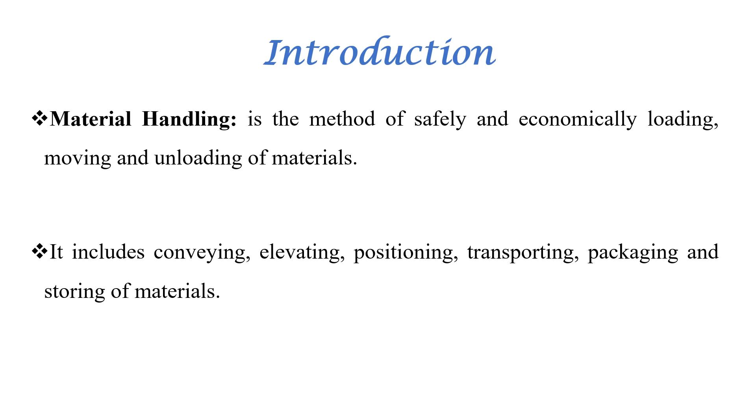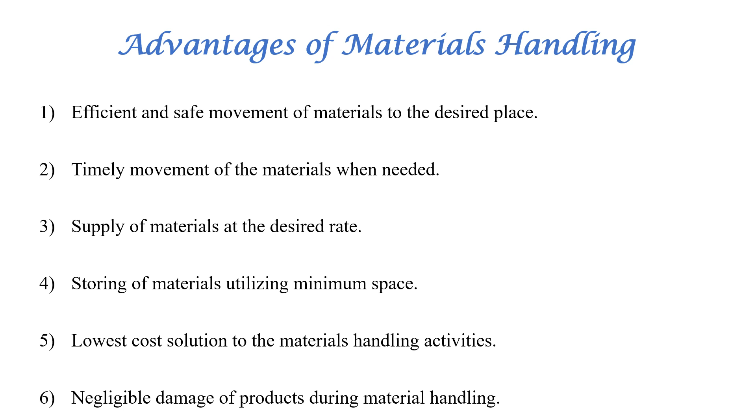Now, advantages of material handling. The essential requirements of a good materials handling system may be summarized as efficient and safe movement of materials to the desired place, timely movement of the materials when needed, supply of materials at the desired rate, storing of materials utilizing minimum space, lowest cost solution to the materials handling activities, and negligible damage of products during material handling.

Now, limitations of material handling. The previous slide clearly shows the importance of material handling in an industry or a material transportation system. However, the negative aspects of material handling should also not be overlooked. So, limitations of material handling are additional cost involved in any materials handling system.

Once a materials handling system is installed, flexibility for further changes gets greatly reduced. Failure or stoppage of the materials handling system at any level of operation may hamper the production system, and the material handling system needs regular maintenance.

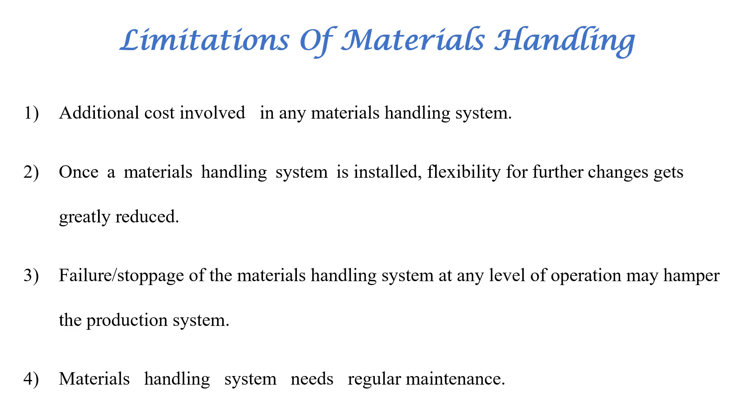Now, classification of materials. Material handling system depends on the type of materials to be handled. Materials may be categorized based on their state, size, weight, etc. For example, physical state deals with solid, liquid, and gases.

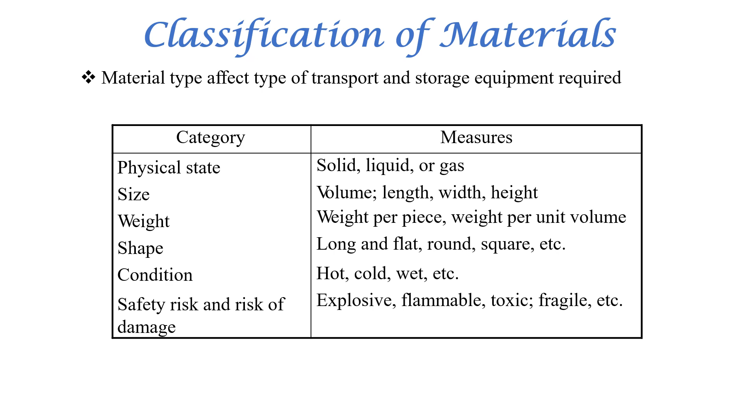Materials can also be classified into unit load and bulk load. Unit load: these are materials which can be handled, stored, and controlled as a single entity. It is counted by number of pieces. And bulk load: these are powdery, granular, or lumpy materials which can be stored in heaps. And unitization is a process of converting bulk load to unit load.

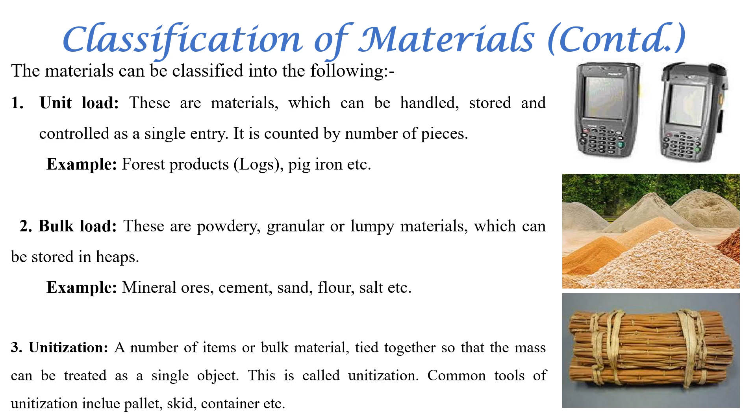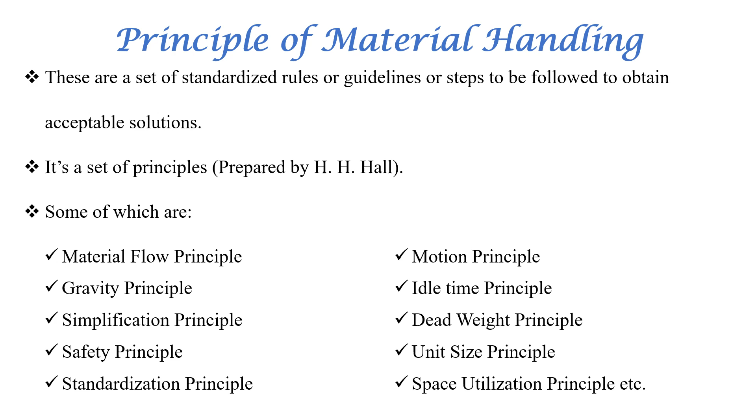Now, the principles of material handling. These are a set of rules to maintain uninterrupted production and distribution. Some of the principles are materials flow principle, gravity principle, simplification principle, safety principle, standardization principle, motion principle, idle time principle, dead weight principle, unit size principle, and space utilization principle, etc.

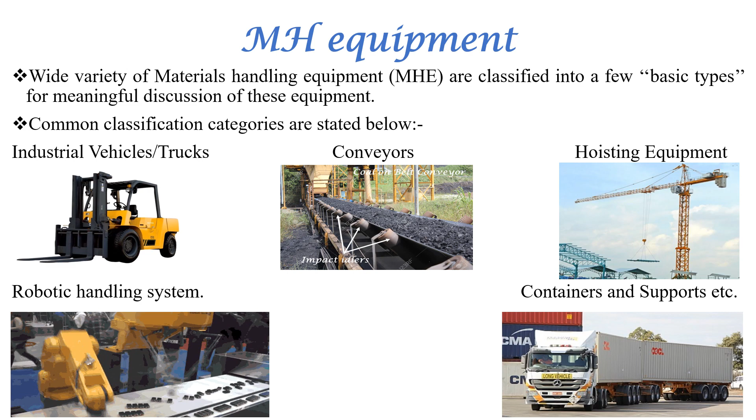Now, material handling equipment. A wide variety of materials handling equipment is classified into a few basic types for meaningful discussion, and common classification categories are industrial vehicles or trucks, conveyors, hoisting equipment, bulk handling equipment, robotic handling systems, containers and supports, and auxiliary equipment.

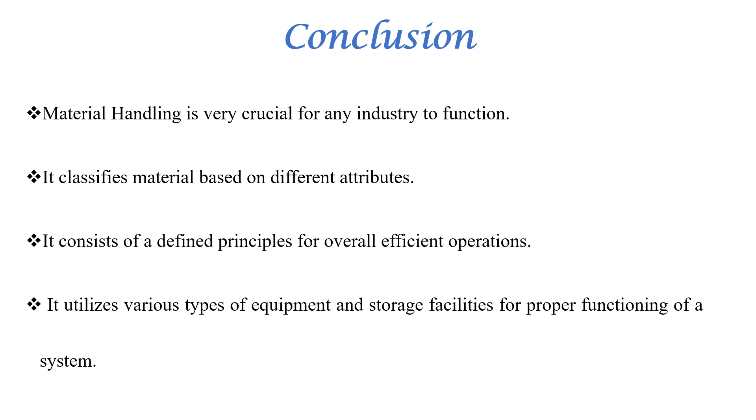Now, conclusion. Material handling is very crucial for any industry to function. It classifies materials based on different attributes. It consists of defined principles for overall efficient operations. It utilizes various types of equipment and storage facilities for proper functioning of a system.